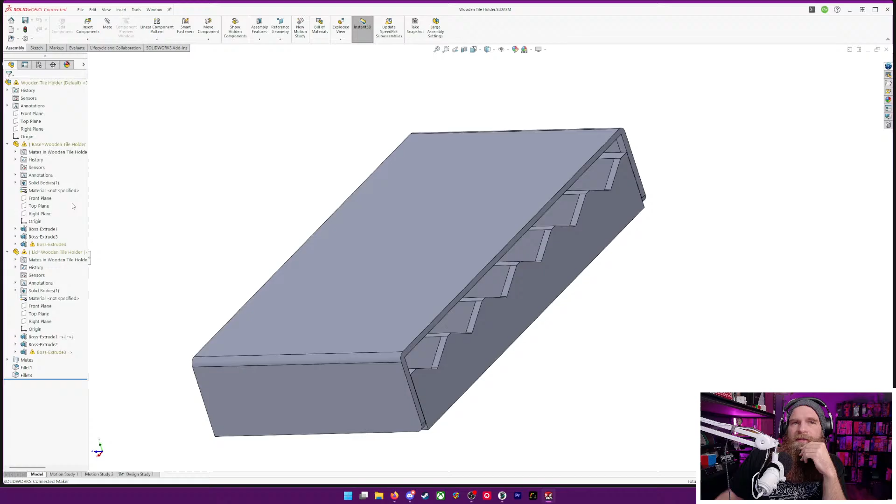Excuse me, let's see here. So I need to steal some settings here. Boss extrude, edit sketch. So I need to steal some settings.

And I'm just going to take my camera on my phone and take a picture of those spaces. Yeah, you like that? I did all that myself. So magical. Yeah, I can make that a lot better. I can make this better. It doesn't need to be this complicated.

So, exit, discard changes and exit. And let's go ahead and move back to my new. And let's go ahead and insert a new part. Oh, cancel. File, save to this PC. Board Games Bonsai, look at that.

So we're going to name this thing Wooden Tile Box version 2. Save. And we're going to insert a new part, and we're going to put this on. So this is going to be the tile holder base. Save. And put that on the top plane.

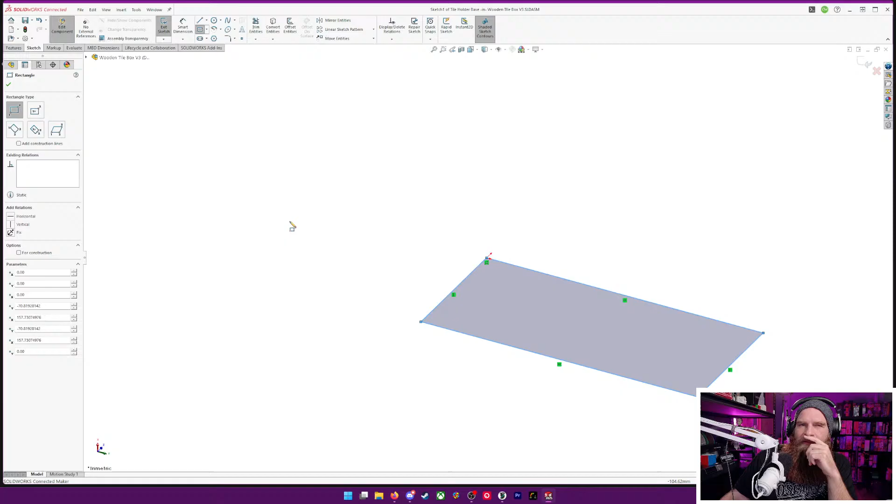Actually we need to base this rectangle on how much space we need for everything. So Control Z, let's grab one of these. Nope, yep, that's actually did it. 6 sides, inscribed. Boom, boom, there we go. Let's do that.

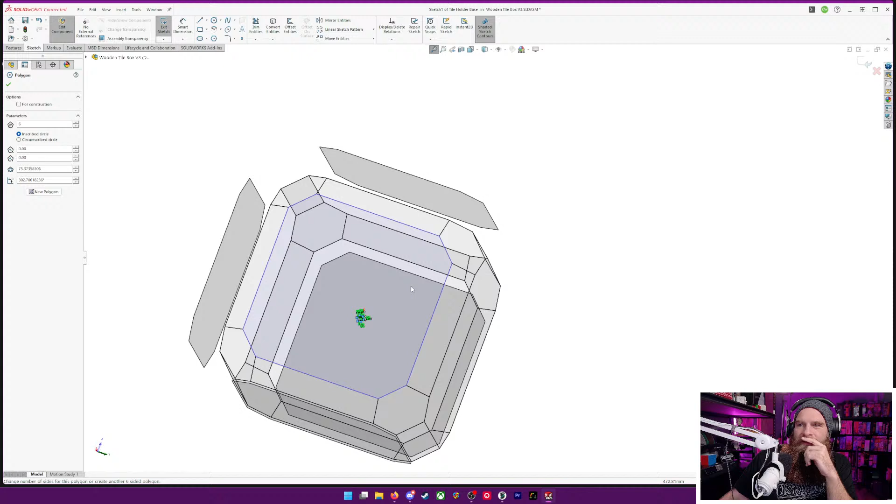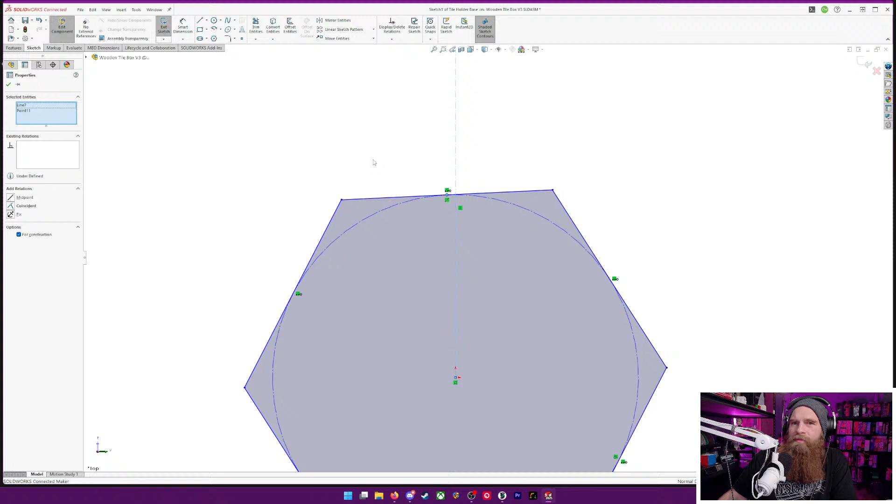Okay, and then we need to draw a line from here to here. Boom, nope, Control Z. S, I need a construction line. So from here to here, so that's going to be for this. I need the... where's that center dot? Boom, boom, coinky dink. Oh, actually, Control Z. I need one of these corners, and this to be the coinky dink.

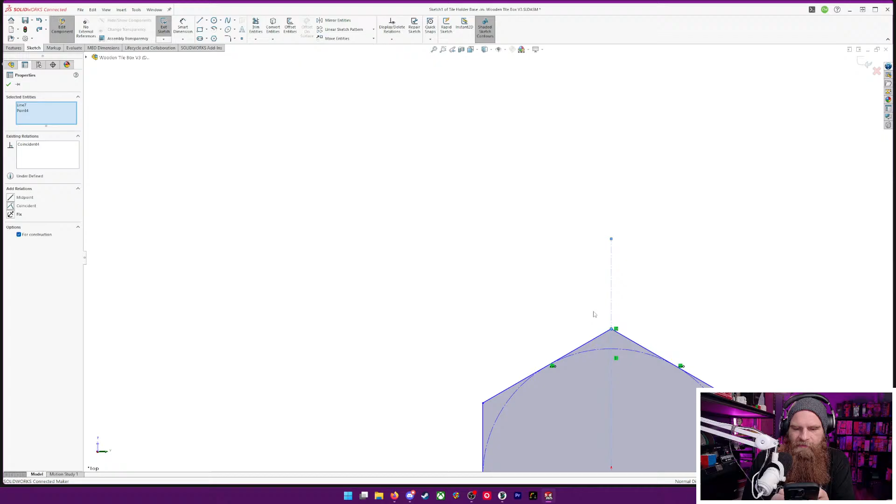There we go, and now we need to dimension this. And what is our dimension going to be? Since I'm just stealing it from the previous one... 26 millimeters. 26, fully defined. And I need a number of rows. 2, 4, 6 rows. Oh, my nose. 6 rows, okay.

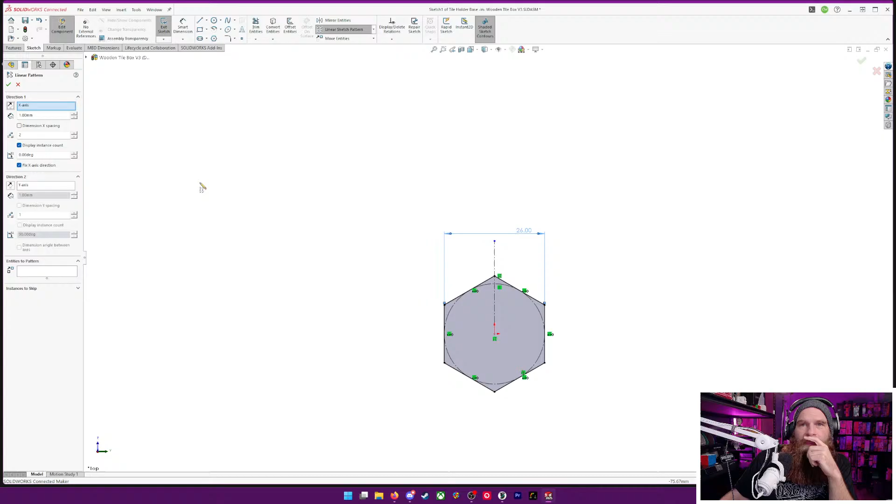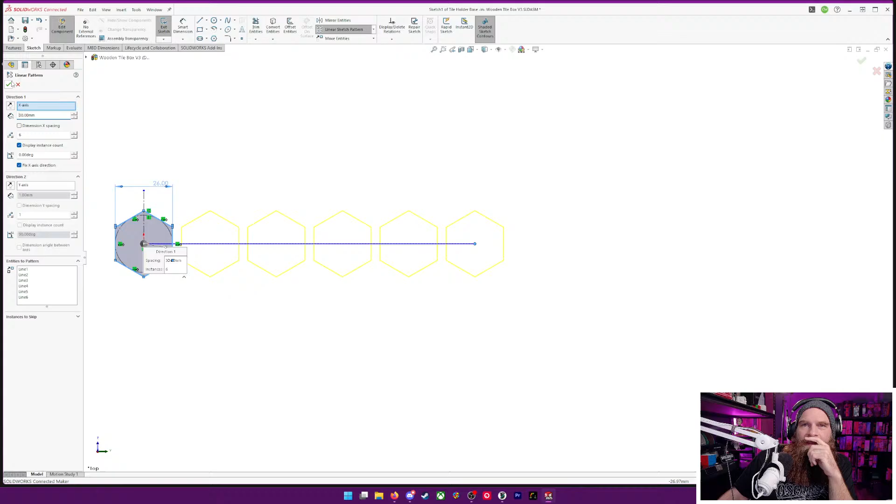We're going to do linear sketch pattern, and we're going to pick this, and we're going to make 3, 4, 5, 6. And we'll do 30 millimeters for now. That's fine, that's fine. 1, 2, 3, 4, 5, 6, that makes 6. Don't have to fully define any of these things just yet. So the gap between these things will be 3 millimeters. Alright, so that takes care of each one of the little areas that holds the bits and bobs.

And I kind of want to make... so one of the things that I didn't like about this, so if you can see this, it is easy to get these things out, but I'd like there to be even easier, like I'd like to be able to see this piece more. So what I'm going to do, instead of doing the sliding lid, I think I'm just going to do a lid that closes on top. Even though I did like this sliding lid, it serves no real purpose, and it actually takes up extra space because I can't just set this thing down.

It just kind of does this because... I mean, I guess I can float it, and it's got this floating area, but yeah, I want to make it so you can see these better in these triangles. I don't like those little triangles, I don't know, it doesn't look very cool, looks like a bunch of saw teeth.

So let's see here, we need to build a box for this. How do we want to build this box? Excuse me, well, we'll stick this anywhere, and we'll stick this anywhere. The start of the box begins. And from here to here, we'll do 3 millimeters. And from here to here, we're going to need more than 3 millimeters, because I need to make... well, if I do a lid style box, do I really need to do that? These are all questions that I should be asking before I get this far.

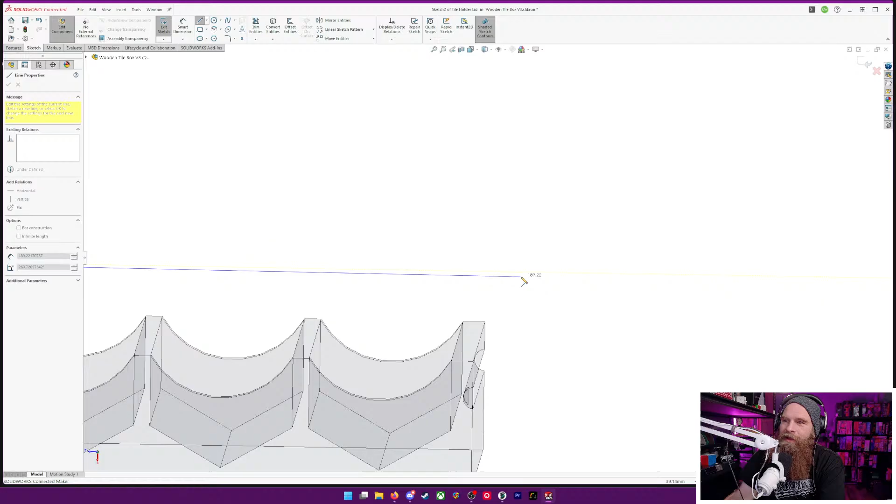Alright, I need to make a lid, we'll just draw. And we don't care about how far we are. Oh yeah, I like how I'm not even showing you what I'm doing. Jeez Louise, I am horrible. I wish somebody was in chat to tell me they weren't even seeing what was going on. They were just seeing my face.

So all of this doesn't matter right now, we're just drawing a rough shape of this lid. That is an ugly lid.

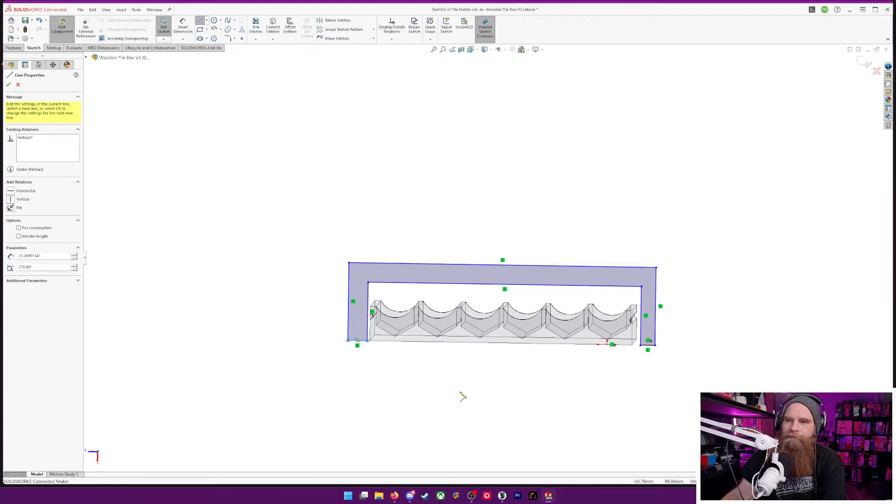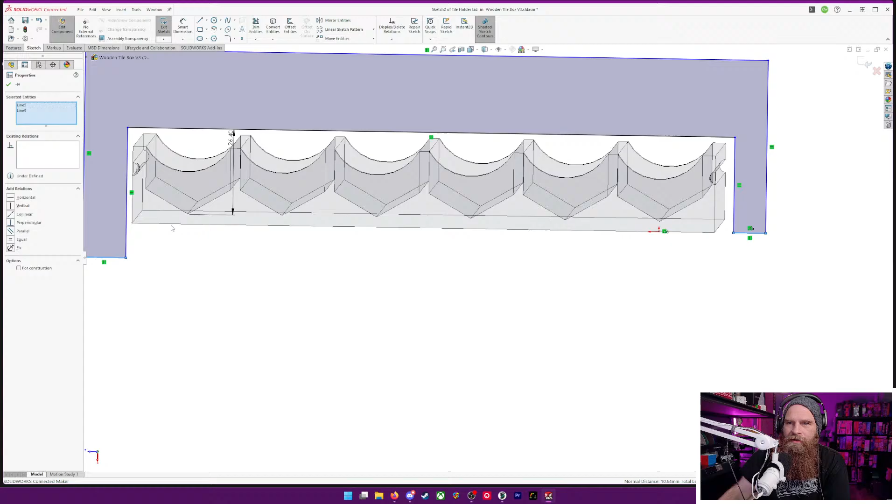All right, so smart dimension, this point to this line needs to be 26.4 millimeters. And this line and this line... wait, what's going on here? Why is that? Okay hold on, this line and this line need to be collinear and parallel. This line and this line need to be equal to each other. This line needs to be 3 millimeters.

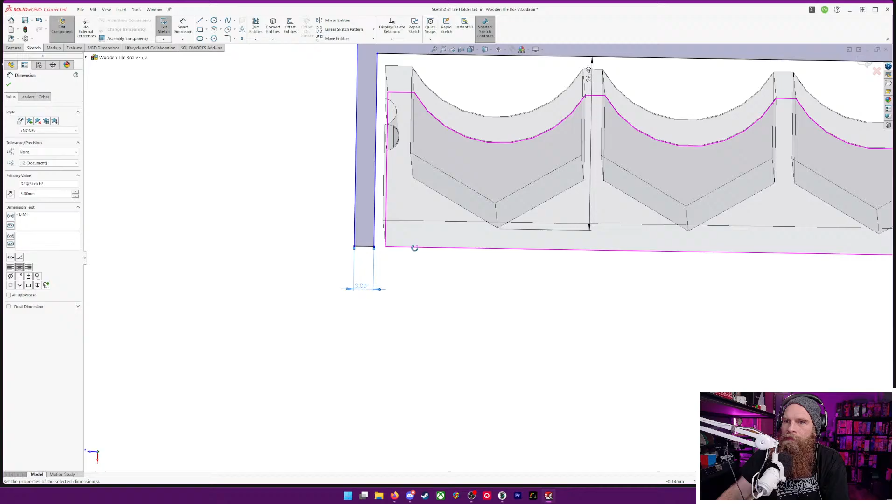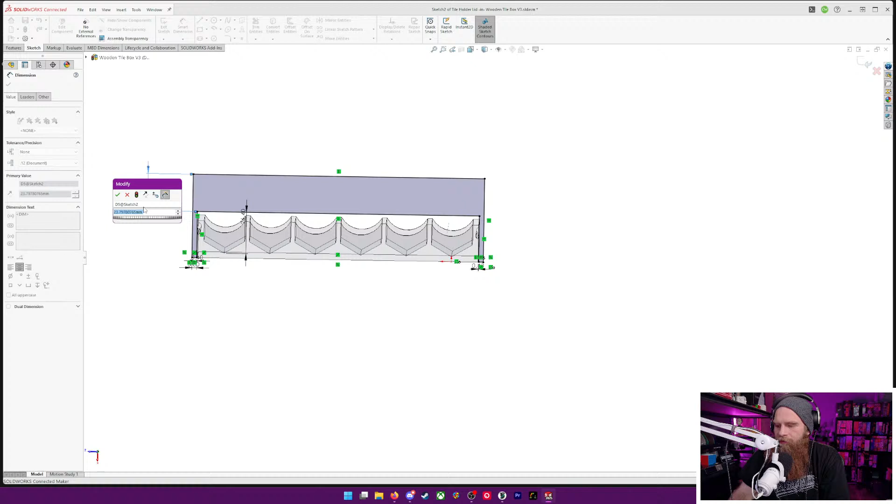And then this line and this need to be 0.4 millimeters, and this also needs to be 0.4 millimeters, and this needs to be 3 millimeters. Okay, we're getting there. And I'm not going to draw the little key part yet, and you'll see why.

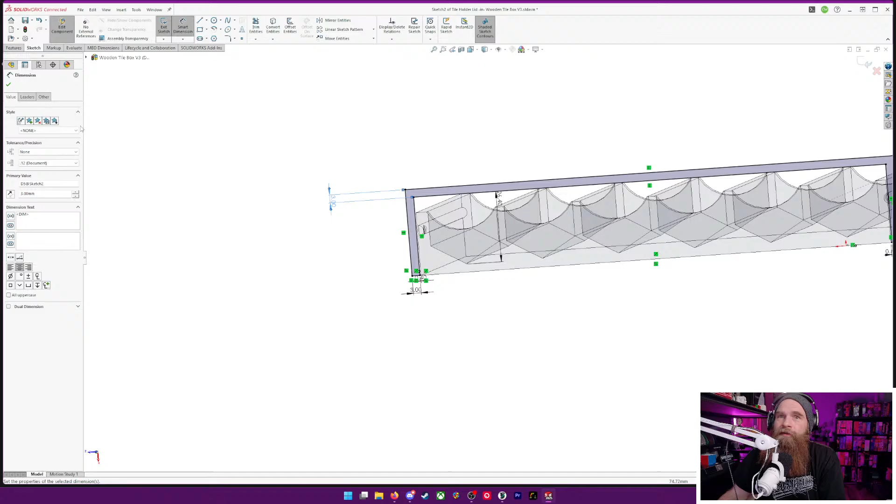So, feature, extrude boss base, and we'll pick the other direction. Actually we don't even need to pick direction. Up to surface, here, boom. And let's see, this is the side with the pin.

So, sketch, and we'll draw a box. Feature, extrude boss base, and blind, 3 millimeters. Boom, alright, that part is done.

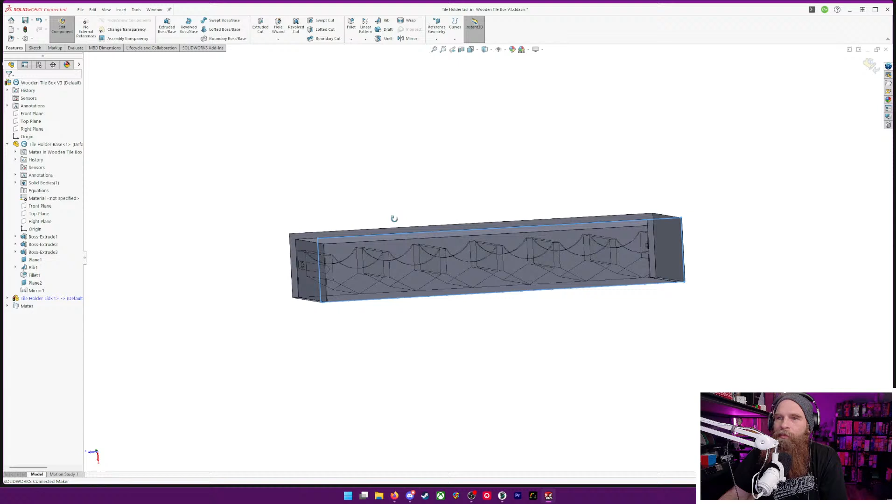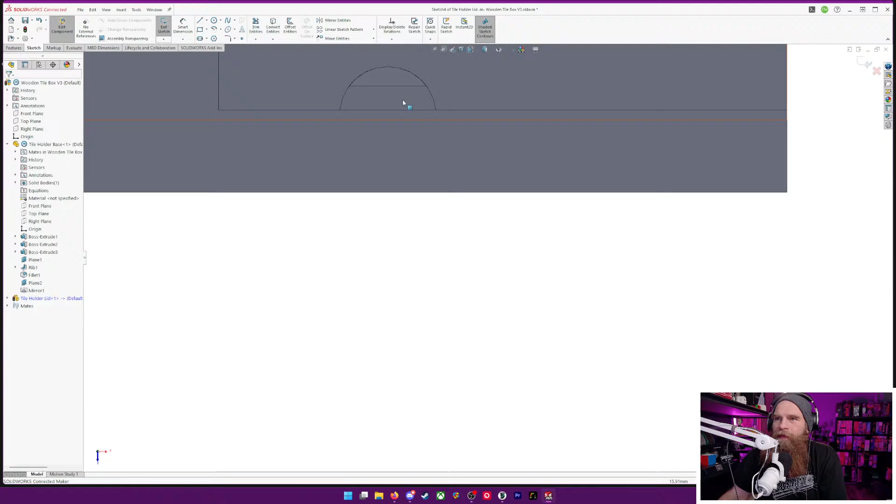Now we need to sketch and center line. There we go. And we need to put a circle here.

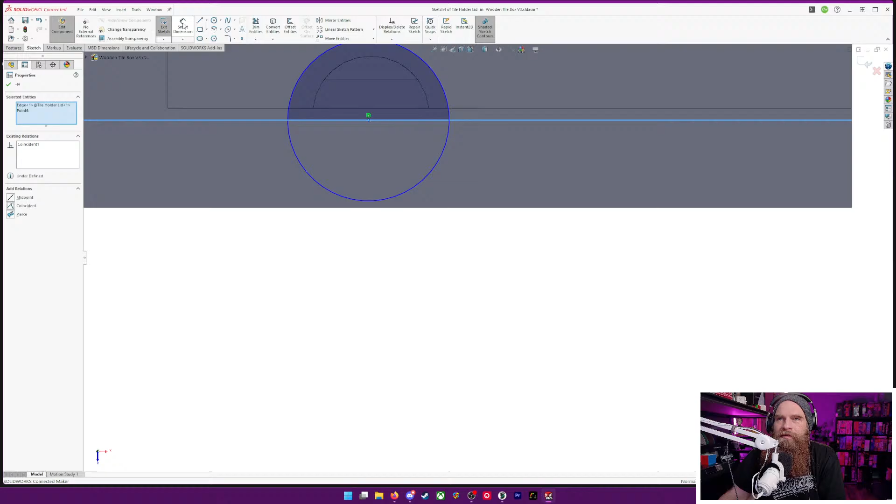And this circle needs to be, this circle actually needs to be attached to here. No, get off the dimension tool. Boom, boom, quinky dink. And smart dimension, I made that one 2.5 millimeters. No, it's 4 millimeters, right? Yes, so I need to do 4 millimeters minus 0.2.

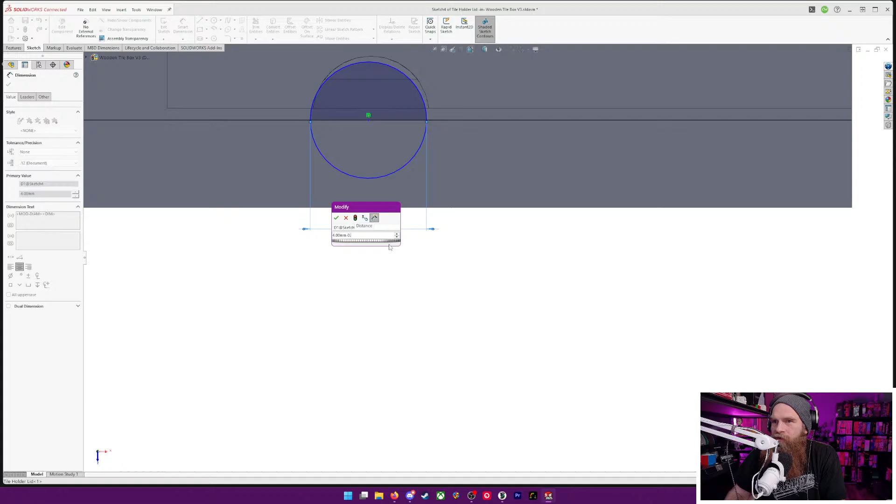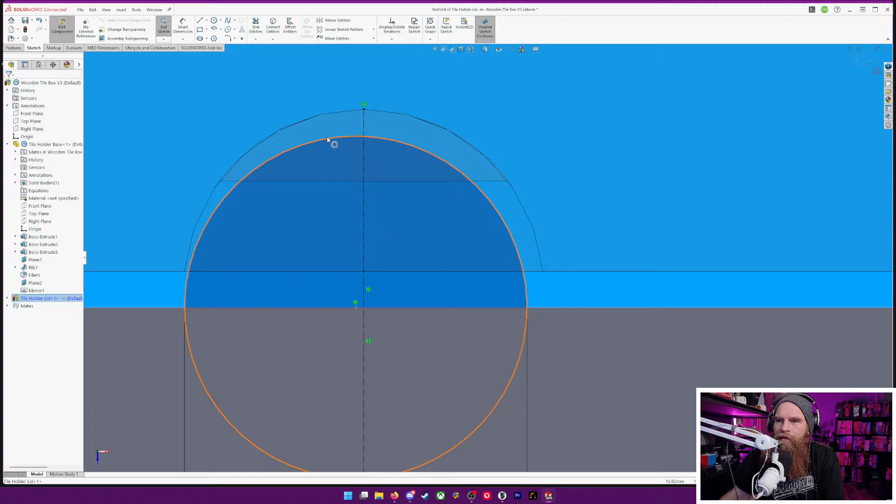And then I need to make a center line and coincident. There we go.

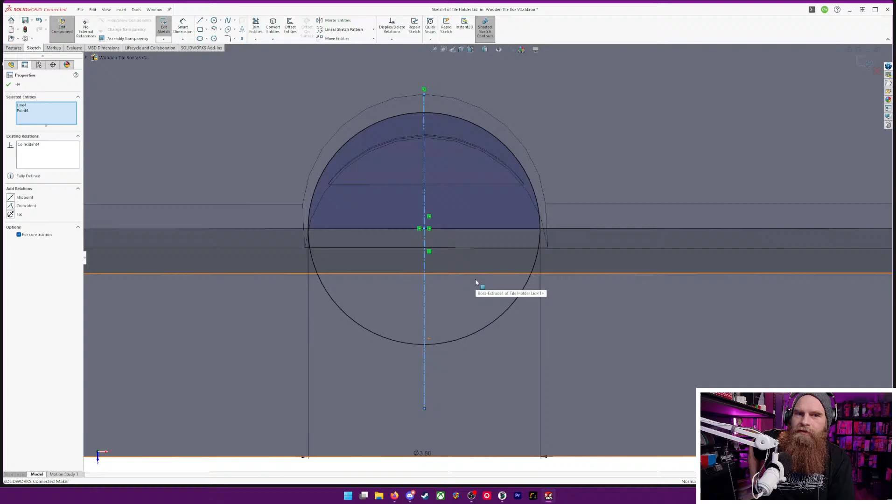Itchy, okay. Did I really want to make that quinky dink? I really need to move that up. Oh, I was supposed to go the other direction. Alright, I can fix that. Let me finish what I'm doing here. Oh, save to PC, oh cancel. Alright, let's finish what I'm doing here.

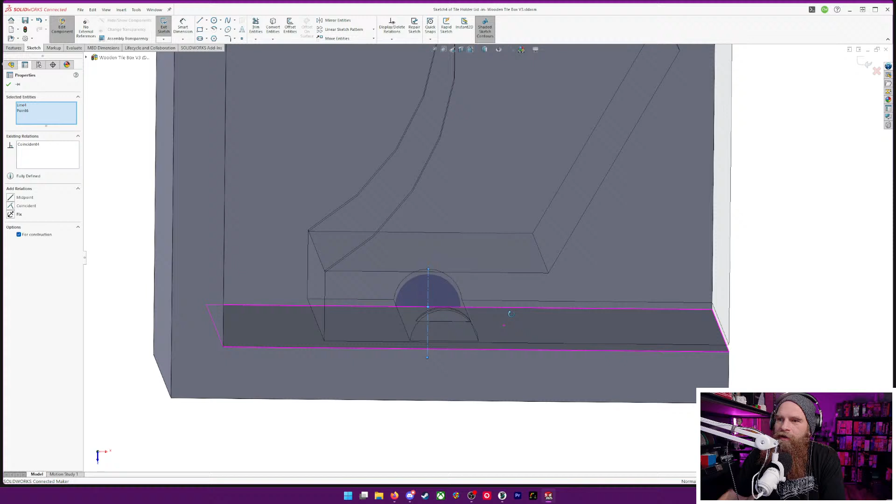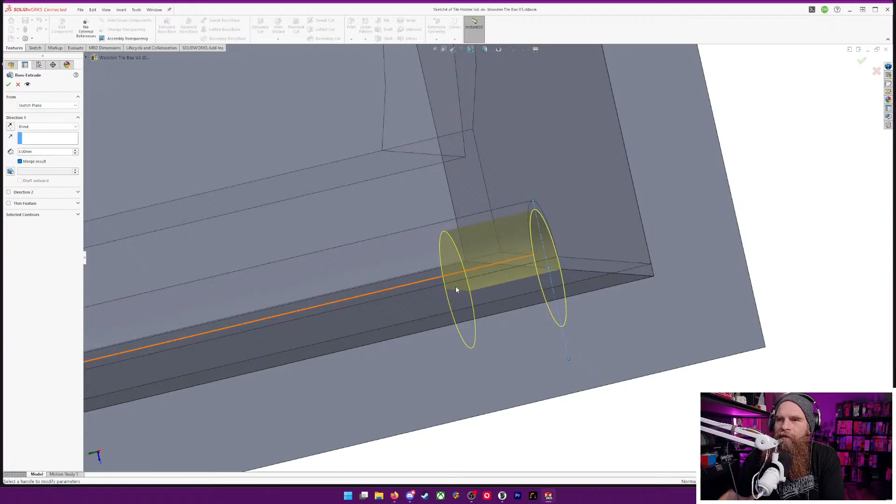Features, and extrude boss base. And we're going to go up to surface. Come on, can I grab that? Let me grab that, no. Erg.

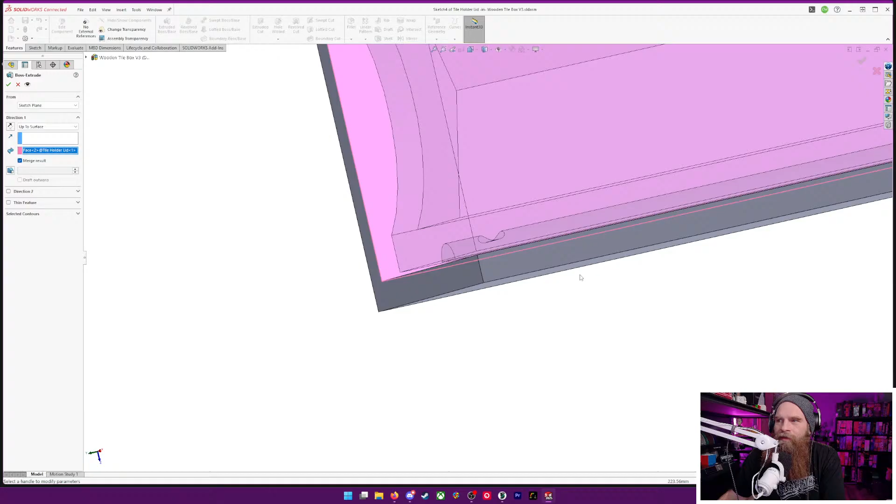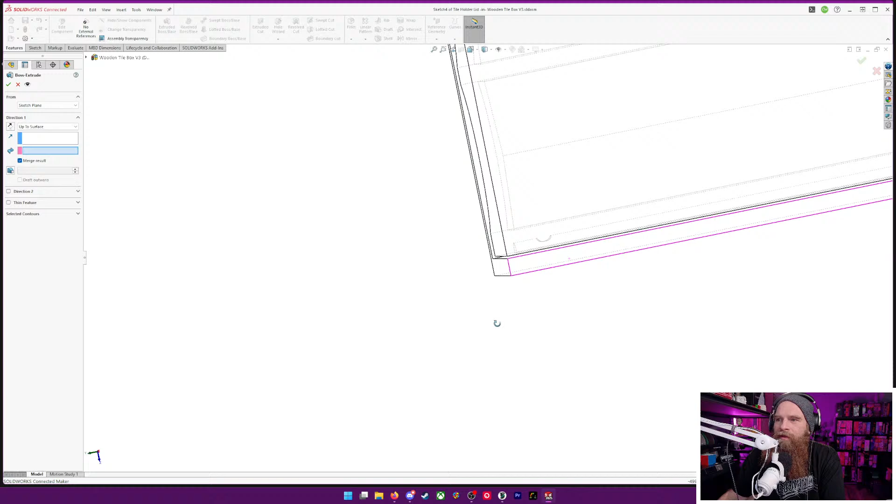Oh, I know what to do. I need to do this and this. Ugh, I hate that I just can't grab that surface through there. Wait, that was so close. Yes.

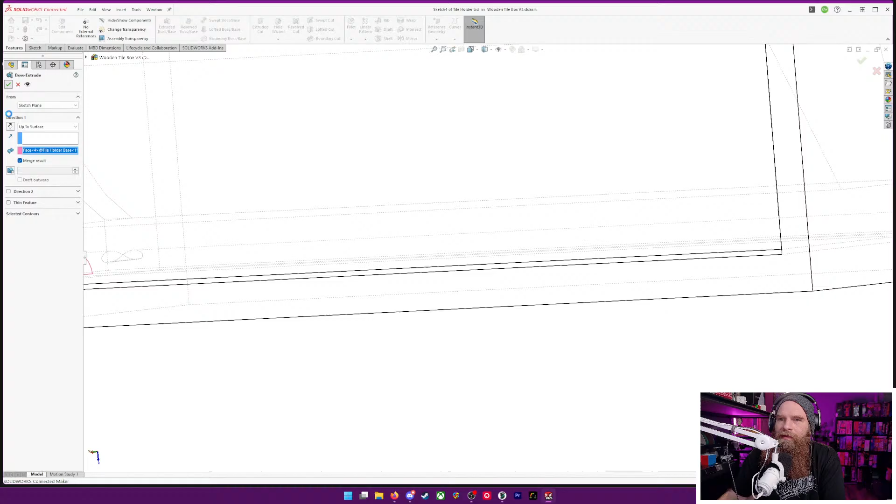Okay, now let's go back to this. Yep, there we go, there we go. All right, and then I just need to make that key in there. Easy peasy. All right.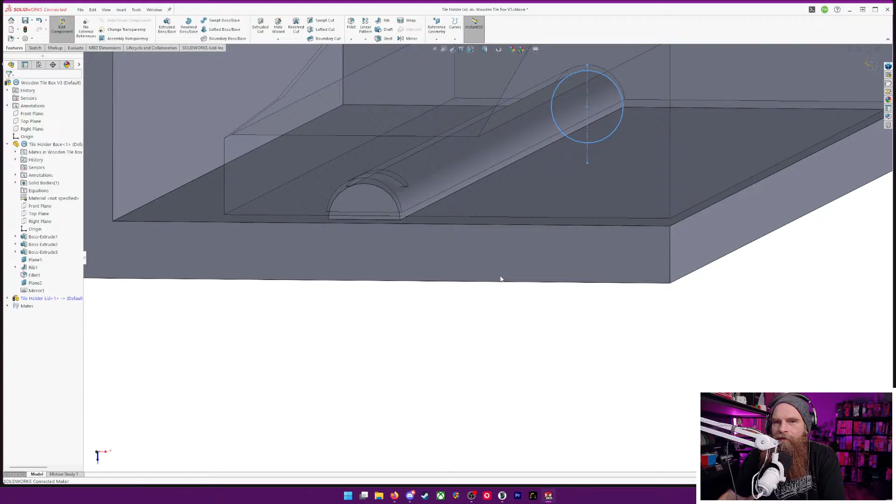So what's the best way of making that key? I need a plane that bisects this. See, this is the part I didn't think about. How do I make that key? This is where I need a person named Grubby to teach me how to do things. I need to make a notch here.

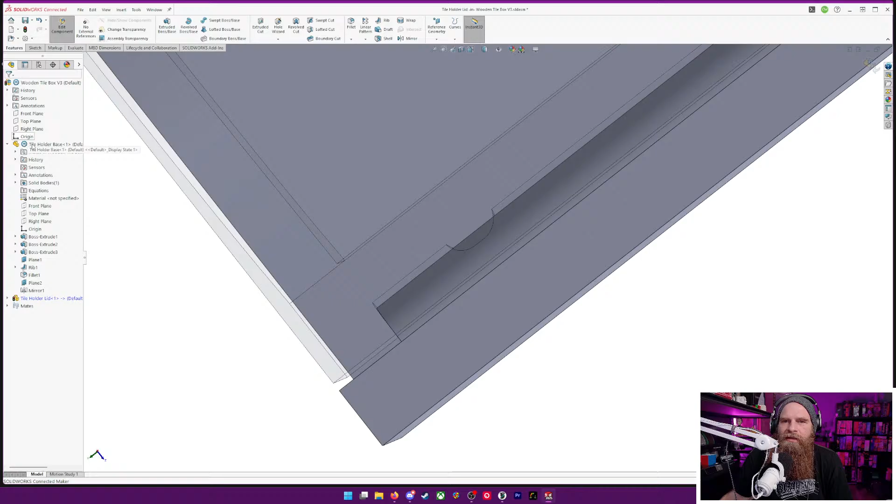Let's see here. I should have probably made a plane in the entire... oh, see, that would have probably done it for me. I can still do it.

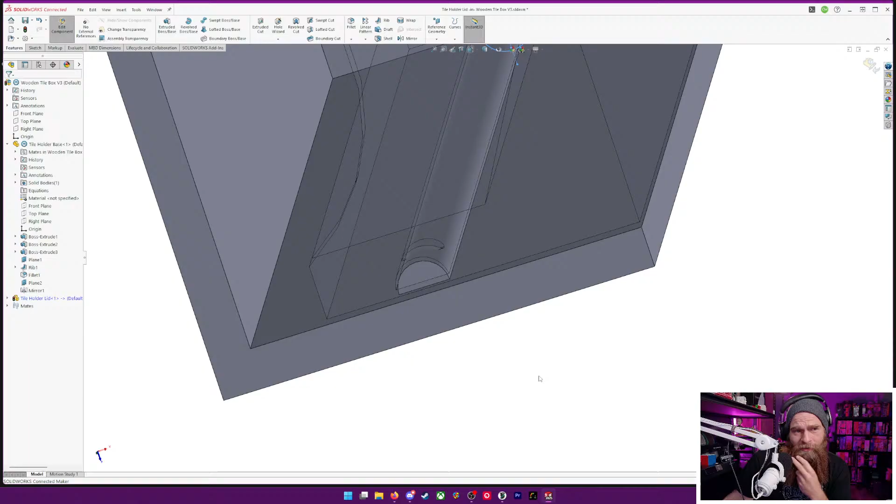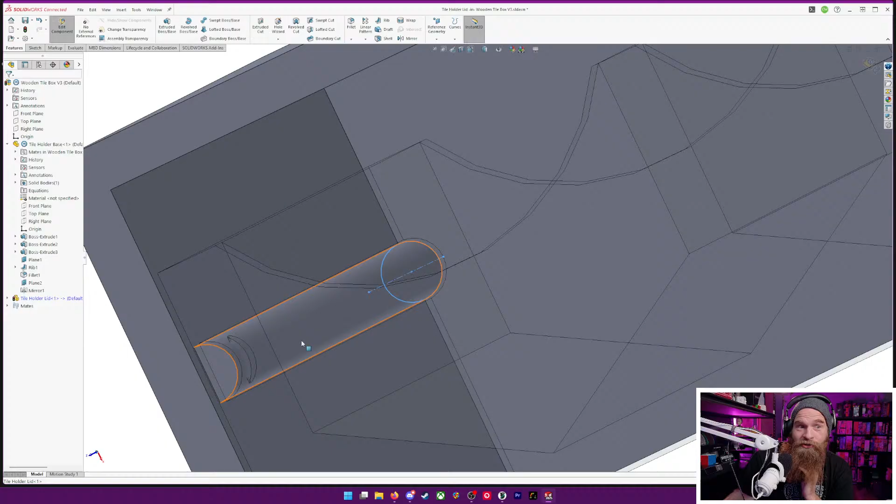Sorry, I got my Steam Deck over here. I had a bug with it. It didn't want to update, and then it's been all crashy. And I ran a command that was supposed to make it work better, and all it did was delete everything. So now I'm really pissed off at my Steam Deck. It's not an out-of-box experience like a Nintendo Switch, which I have too. That thing works great, it doesn't just crash and say can't update. Error, with no resolution. It just stalls.

I need to figure out how I'm going to... how am I going to make the... These are all good questions.

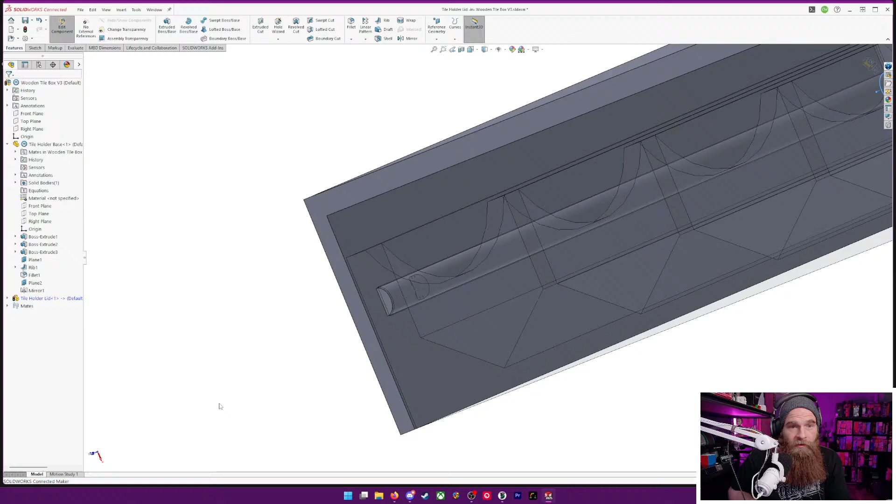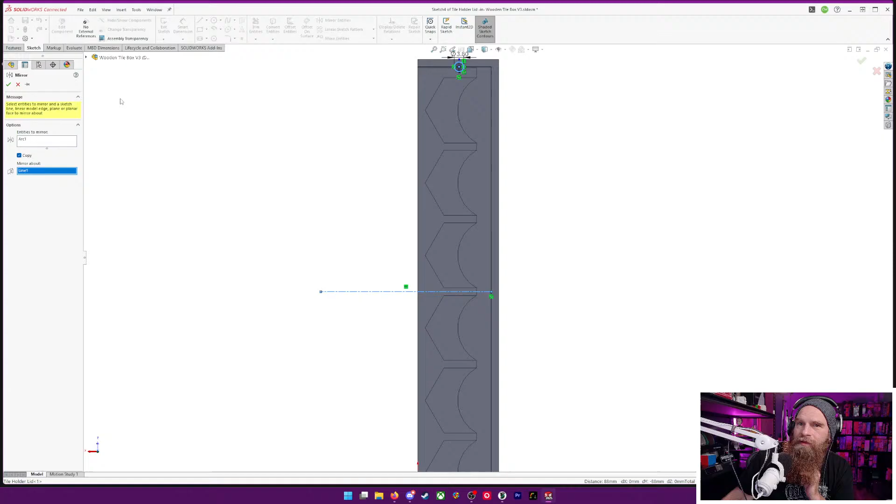Well, before I do that, let's go back to the sketch. And let's go ahead and mirror entities, mirror this, and we're going to mirror that across this. And hit that, and boom. Now I have it on both sides. Yep, sure do.

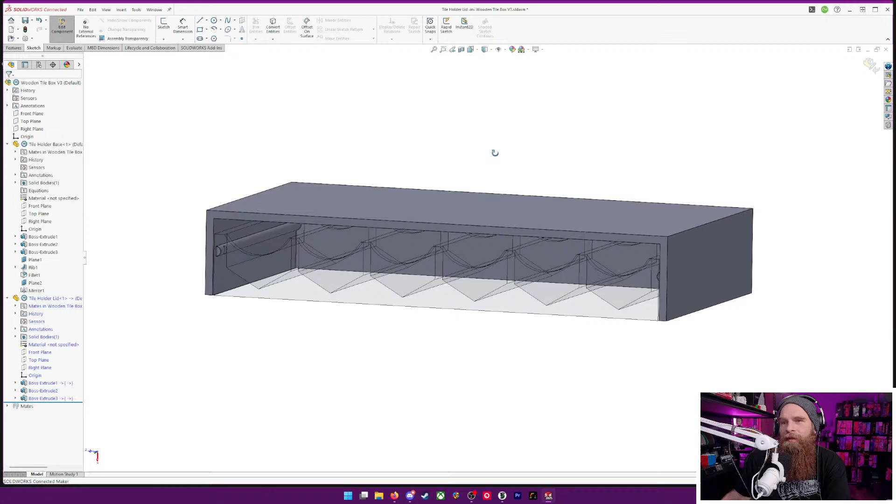These are all things that I need to figure out. How do I make that key?

I mean, I probably made that notch very wrong.

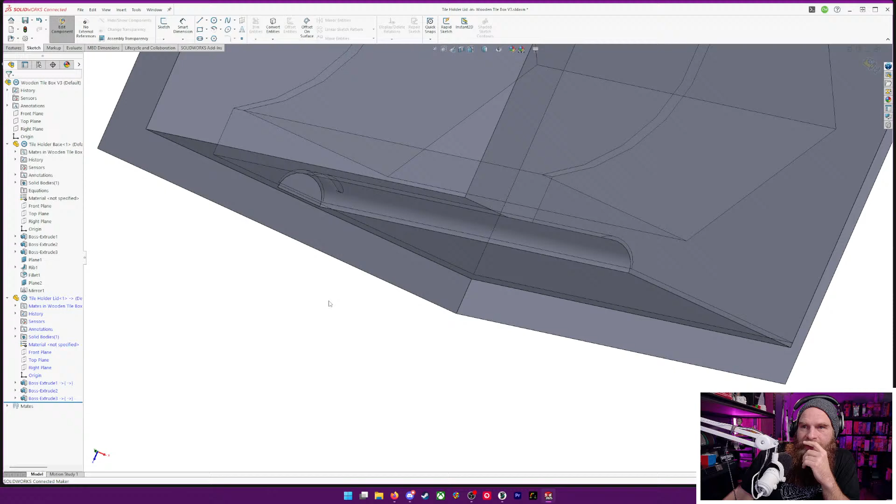Because it's what, this plane? This plane I used to make the rib. And that's the problem. I should have made that plane a global plane instead of making it a plane just in that part, because then I can't use that plane to make my other end here.

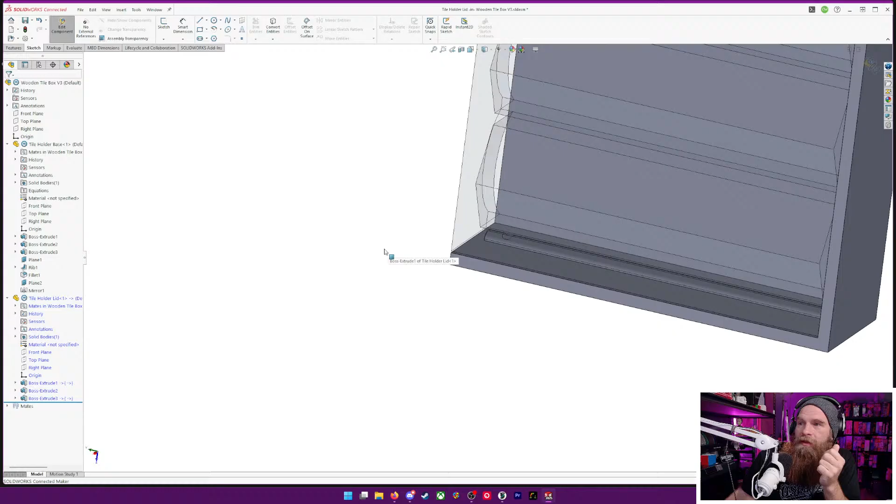So I might have to do some backtracking here, which isn't going to be a huge problem. Not going to be a huge problem, but I'm going to leave this part. And there we go, we have our box.

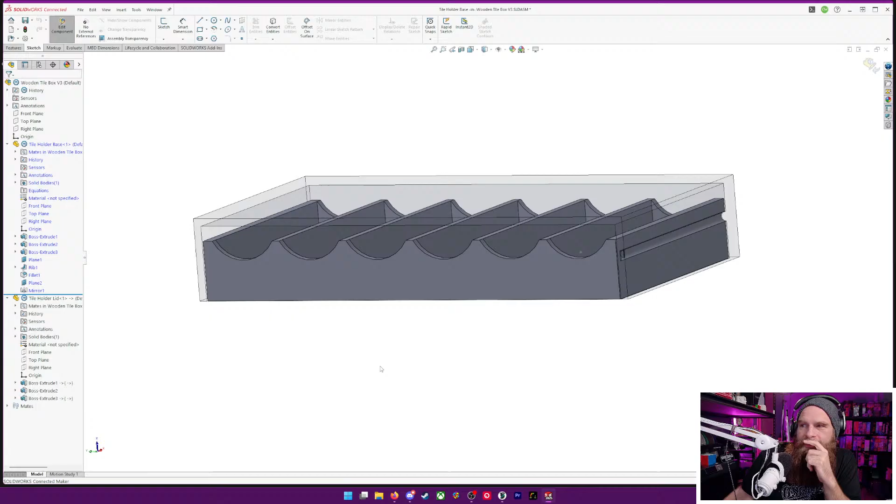With a sliding lid, but I didn't build the lock right. So let's go back to this part. Edit component, and we used this plane that I designed to do that. I need a global plane. I need a plane that's...

Oh, I'm so... it's already 10 o'clock. Jeez Louise, I've been streaming for almost an hour and I'm already tired. I wouldn't be so tired. I would have started streaming sooner if my Steam Deck didn't have that bug.

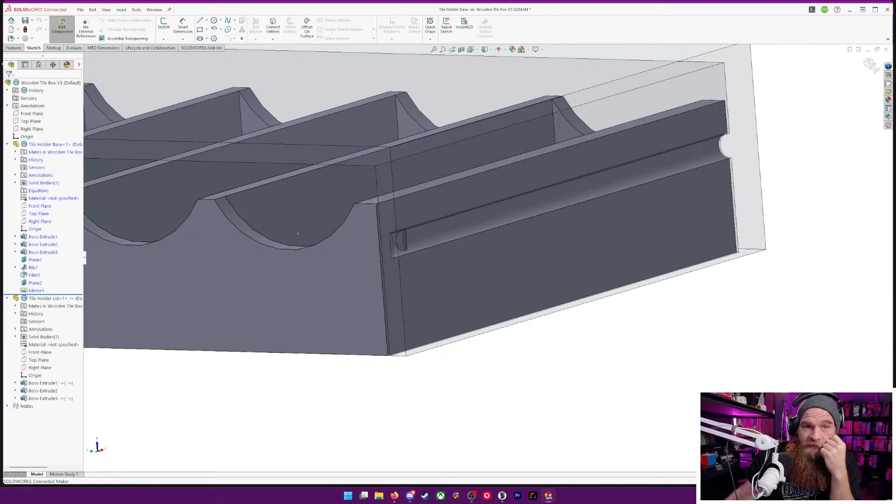Well, I can get rid of all of that right there. See, it's gone. And...

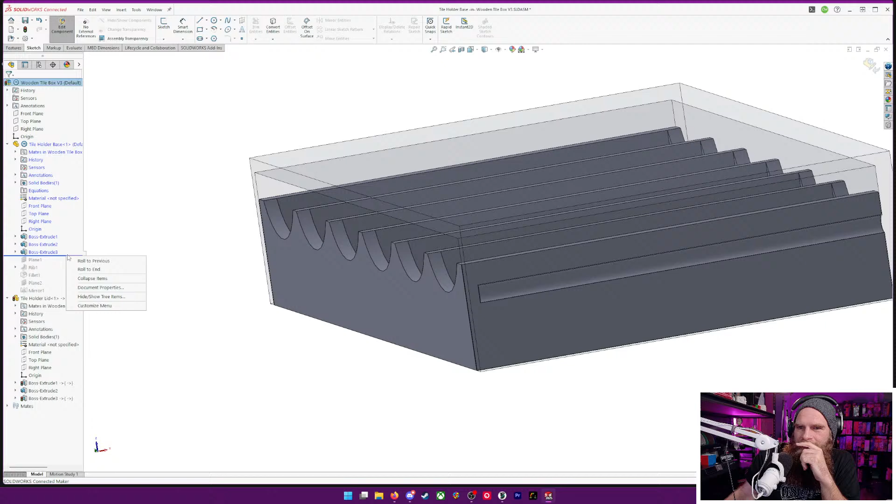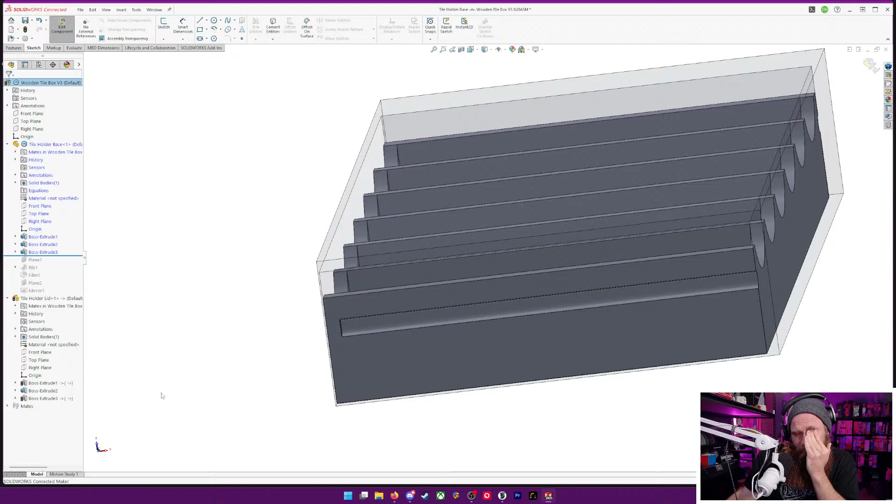I can make a global plane and then add the key and use that same plane to make. What's the best way? I thought I had it. I thought I had it, but in fact I did not.

Man, all right, let's see if I can figure this out. Let's leave that there, let's leave this part. Go back to my lid and figure out how I want to add.

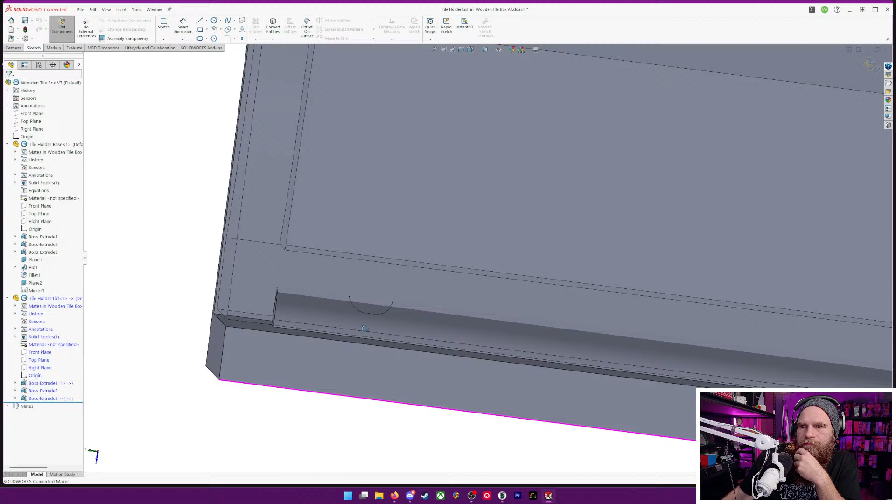Yeah, I mean, really all it is a square notch, and I added 2 fillets too. So I can do that exact same thing to this.

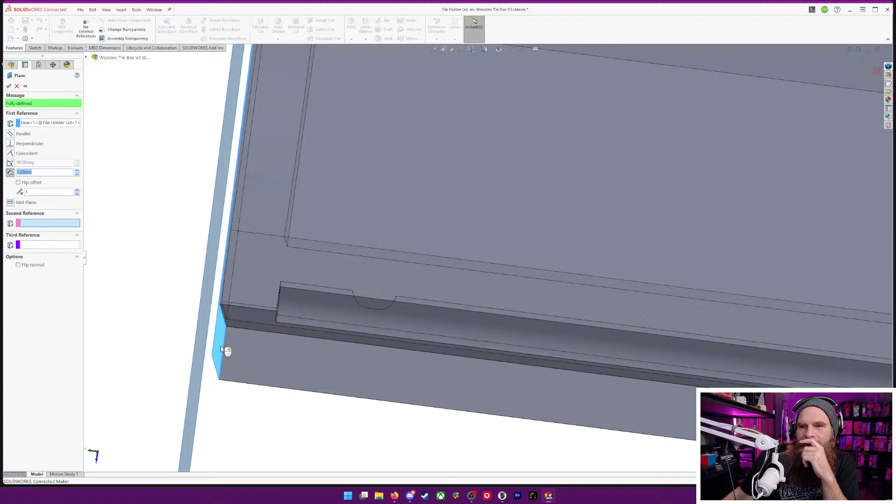So let's add a plane feature. Add a plane. And we'll base it off of here. And opposite.

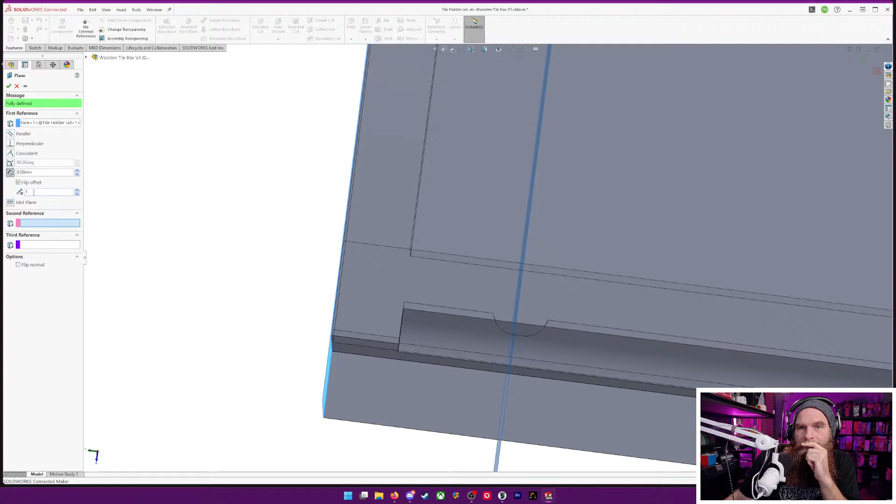Yeah, of course that's not perfect. What would that number have been? Really shouldn't be doing it like this, this part is wrong. Yeah, because that should be 3 millimeters. Yep, 3, 4, 5, 6, 7. Yeah, 7 is the edge. 8, 9. Oh, that's right, it should be 8.5 or 8.25. Because it was 4.5 or 4.25.

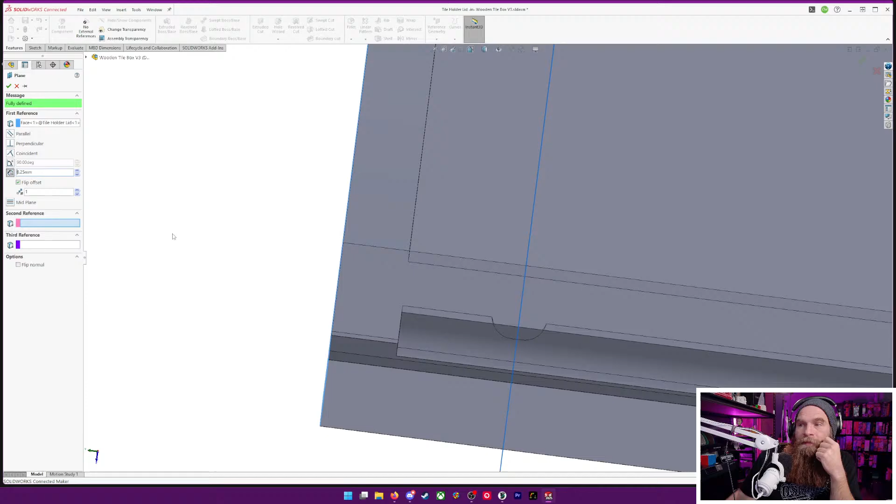So, boom, plane. That plane there doesn't really help me, because I want to be able to cut straight down through the object from the center of it.

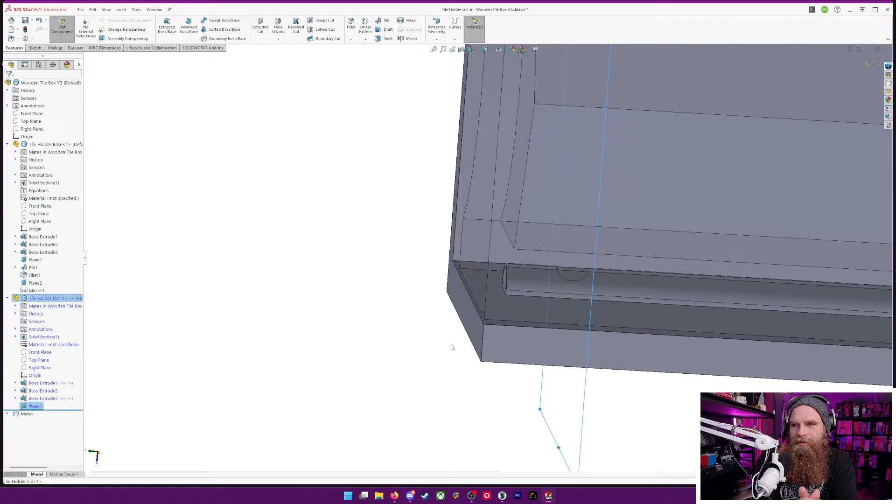Oh, man. I really want to take a rectangular... no, yeah, I'm wrong, I mean it could work. But really what I could do is edit feature. And instead of that, we'll do 7. Boom.

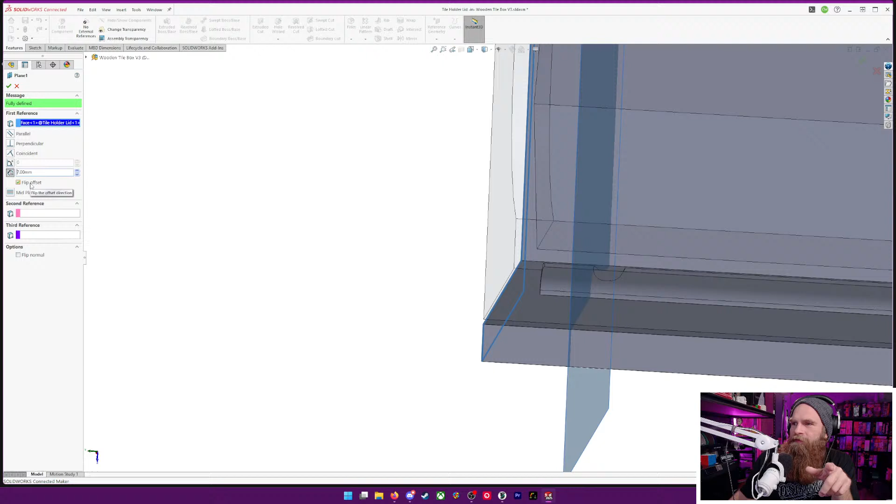And we'll sketch on this plane.

Yep. That's not much of a key, but it'll do just fine. So we'll do a little rectangle here.

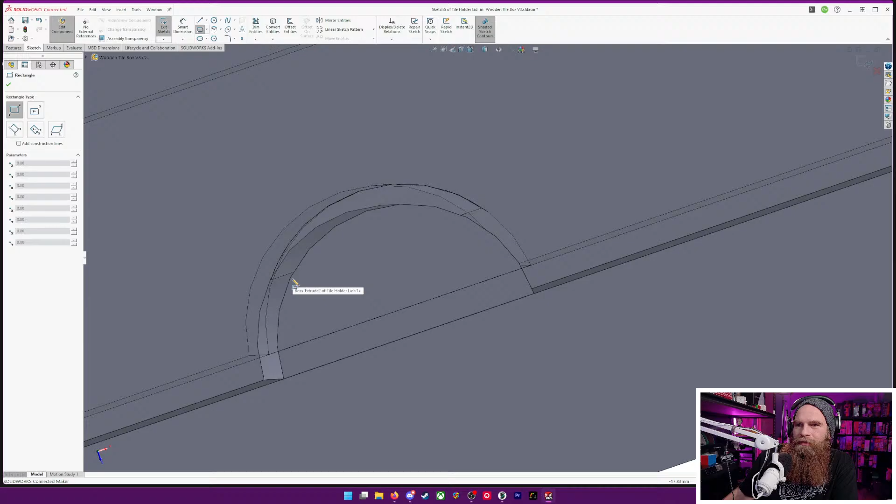Whoa, why did that rectangle go there? Oh, try to base it off the... okay, I'm lost. Where did we go? Okay, that's why.

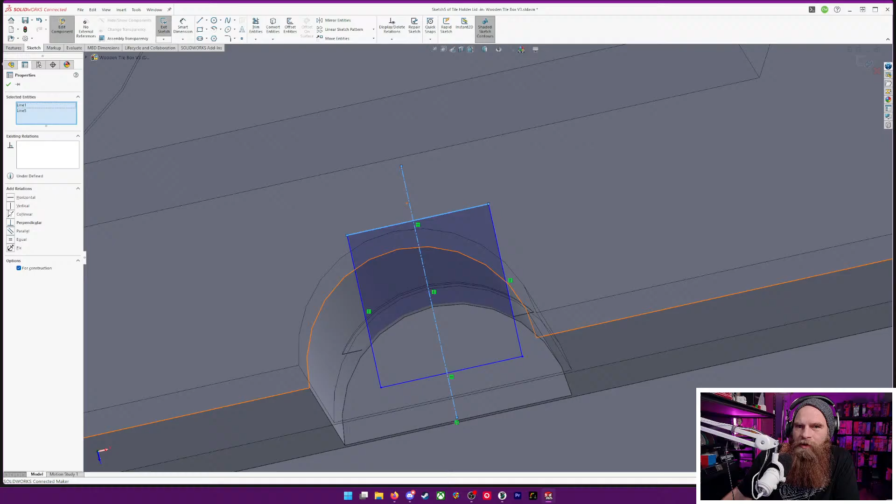So... center line... where is... there we go. Endpoint? No, that doesn't make any sense. This dot and this, coincident. Okay.

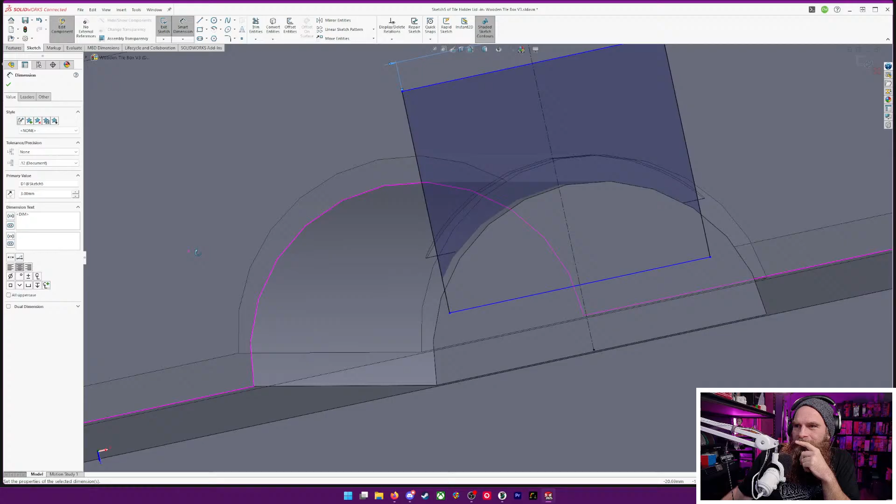And 3 millimeters. Ugh, hate that my axis of rotation is so far away. Okay. Four? Nope, 4.5? I'm just winging it at this point. I'm honestly just winging it at this point.

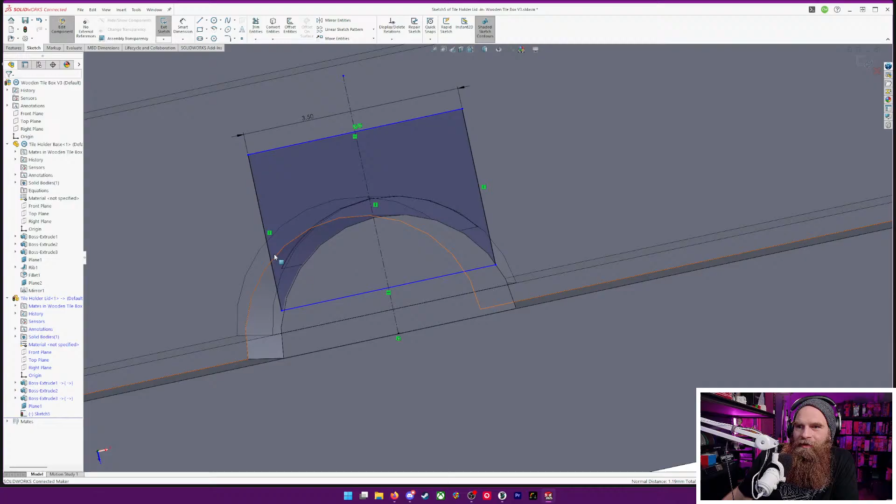And this line and this line need to be... sorry, this line and... nope, get off of the dimension tool. Oh, I can't just select that line? You silly goose.

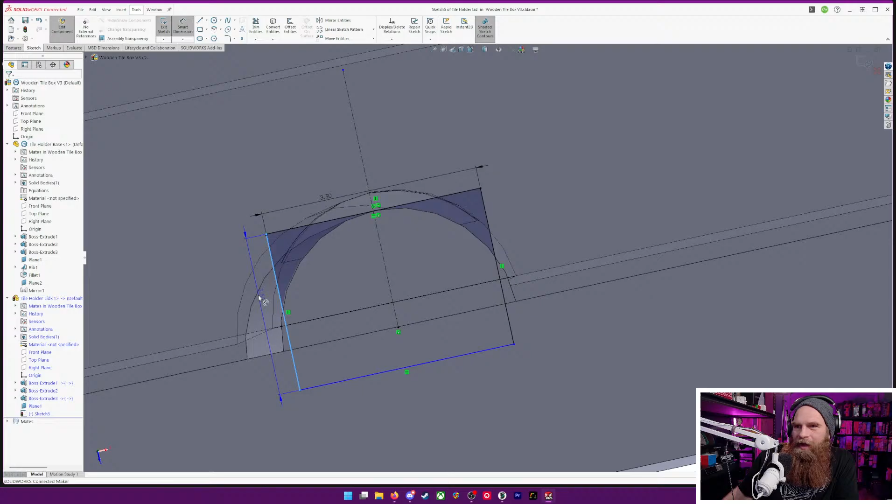Okay, well this line and this can be tangent. And this notch can be 2 millimeters. That'd be weird, that'd be half of it. 1 millimeter? 0.8? 0.6? That'll do.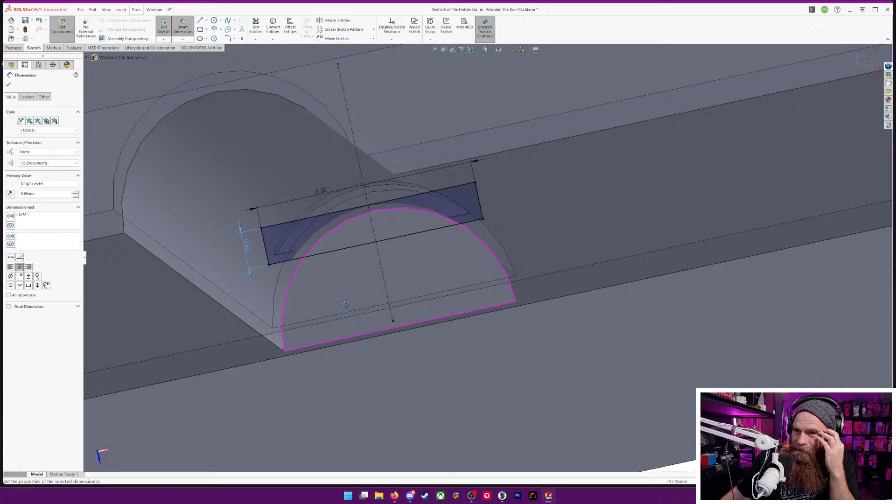That'll do. And feature, extrude cut, and 4.5 millimeters.

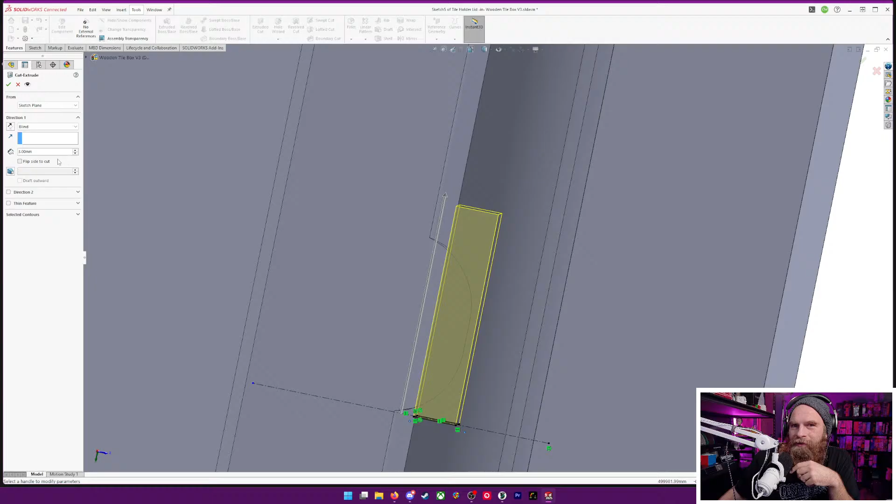Yeah. Yep, that is right on there. That's a little long, 2.5. Boom.

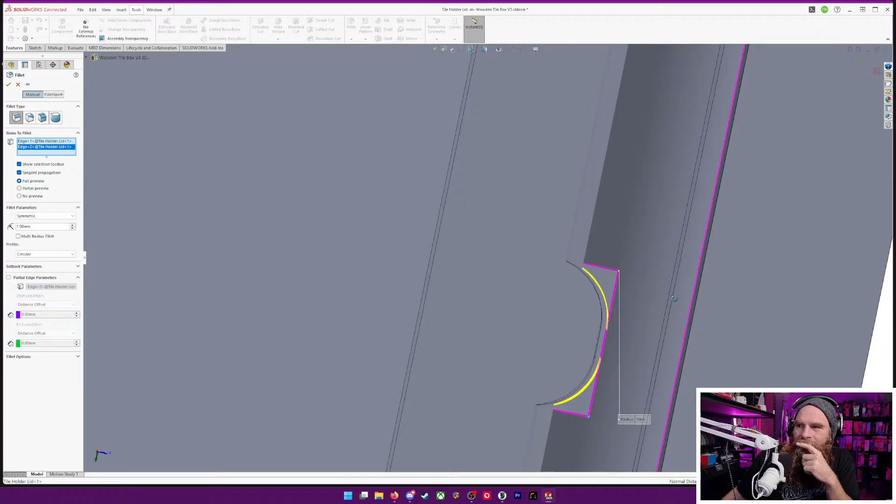All right, and then we're gonna do fillet. And fillet. 0.8, yeah that works. Well, that was the very worst way possible of doing that. No, do not do what I was doing.

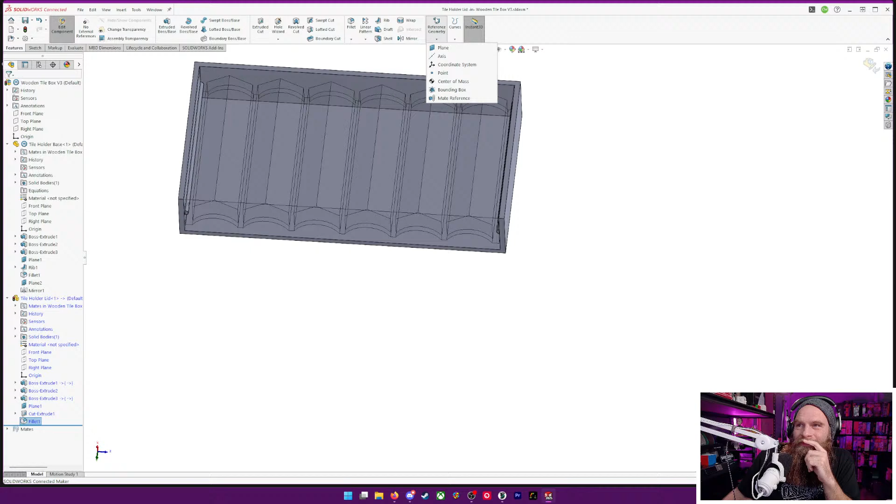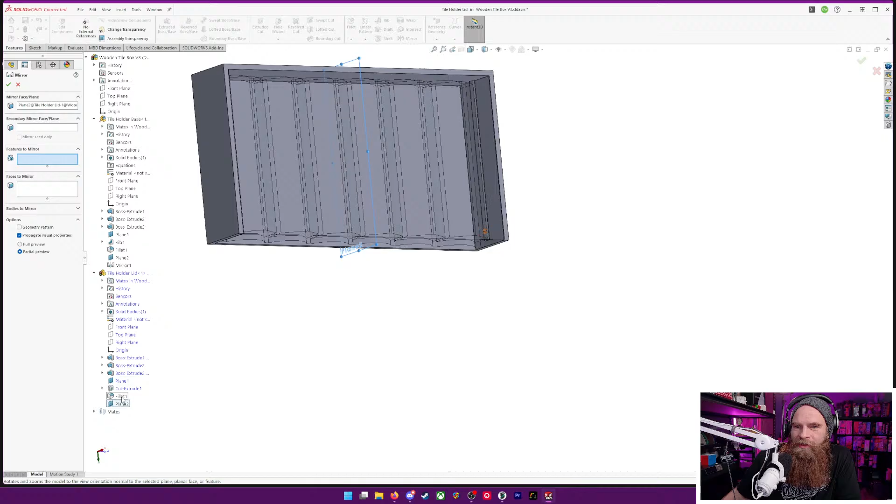All right, and reference geometry, plane. Boom, boom, boom. And then we're going to do a mirror. Mirror plane is going to be this new plane we added. And features to mirror is going to be this and this. Boom.

Okay. I mean, I did it. I don't know if it's going to work. It's going to be a good test. But it's all there now. It's all there.

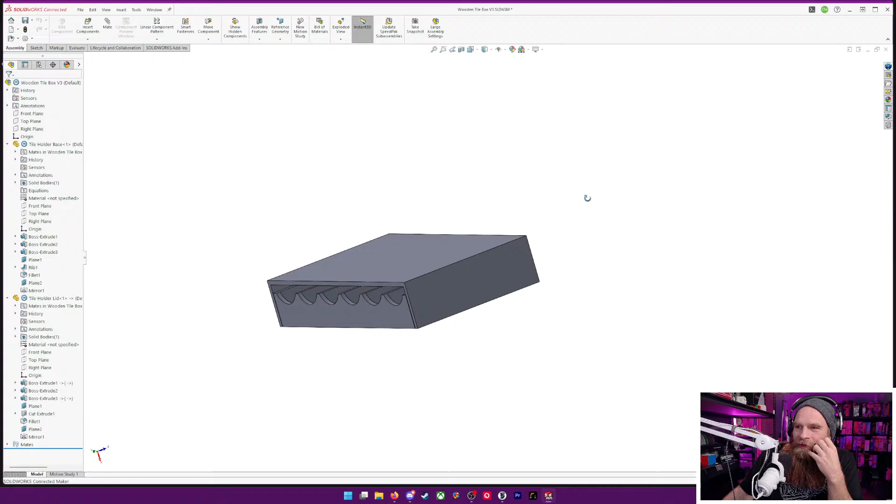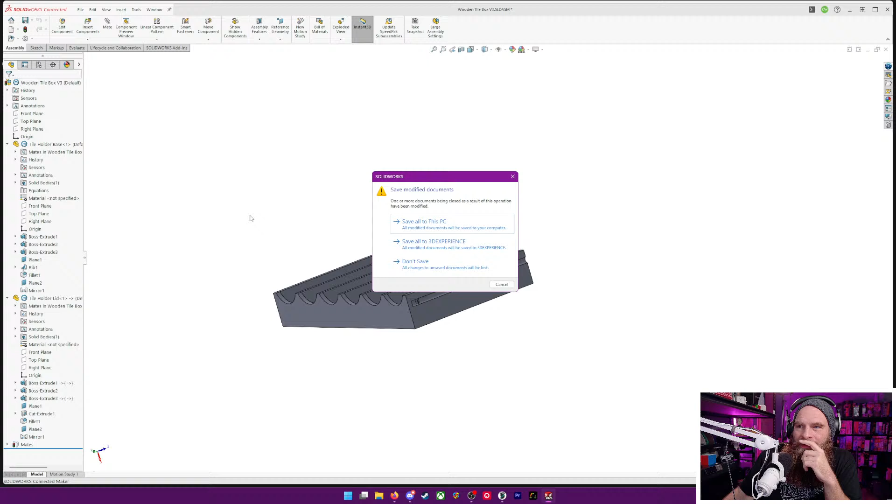I think Grubby told me if I did, is it this? And suppress. Oop, cancel. All right, file, save, save all. Oop, unsuppress. Where is it?

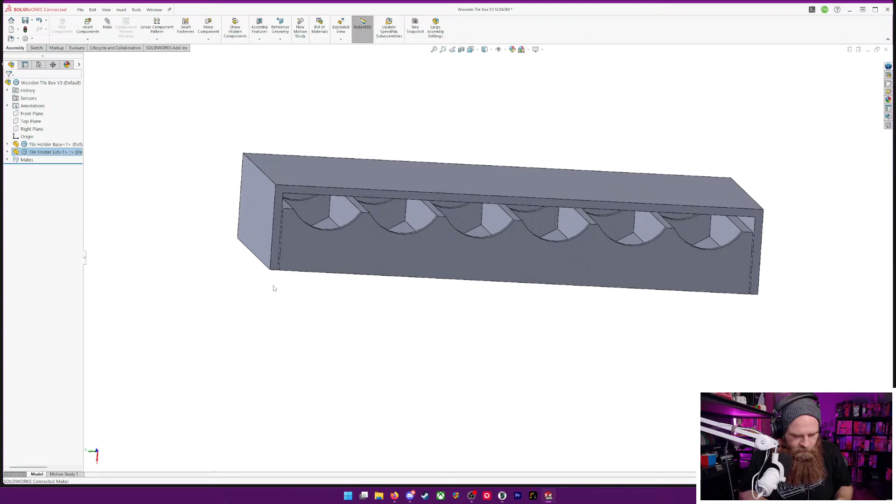I don't remember how he showed me how to do it. Alright, now we can add some fillets, because we gotta add some filletos. I didn't even add any to this one. But this should work, this should work.

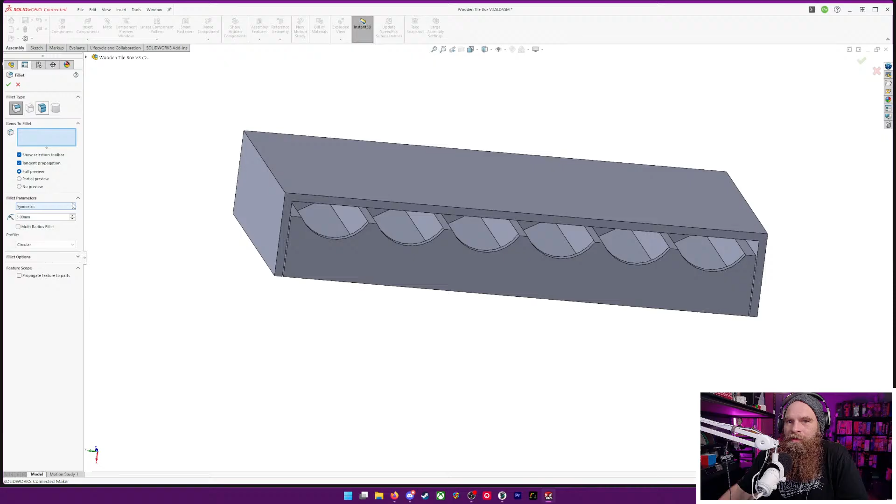So assembly features, fillet, and 3 millimeters. Boom. Wait, what? Oh, there we go. Come on. Yeah. Yeah, we make those rounded corners. And boom.

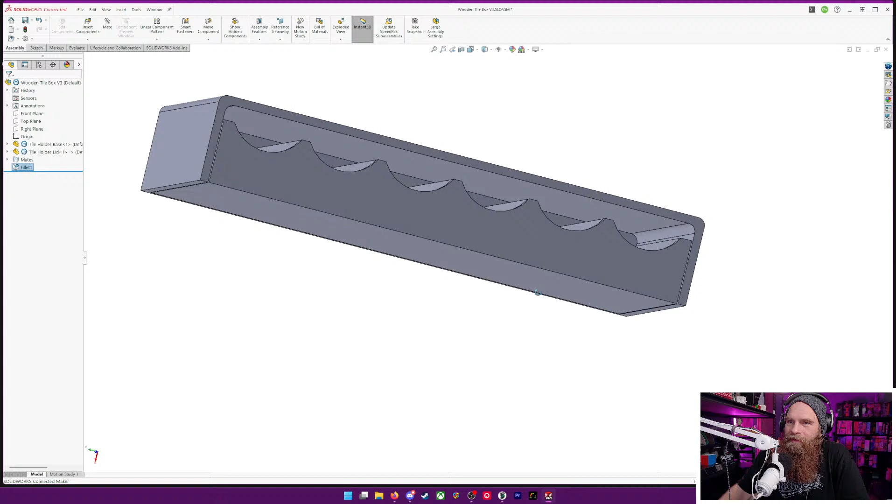That's really the only ones I wanted to do. Oh yeah, I had a little notch here. I could add a notch there, but we won't. We'll do a test print of this and see if it works out. That's it, that's all I want to do. We'll hit save.

Save is done. I wish I could remember what he showed me to do to make it so it doesn't, so I can move it around.

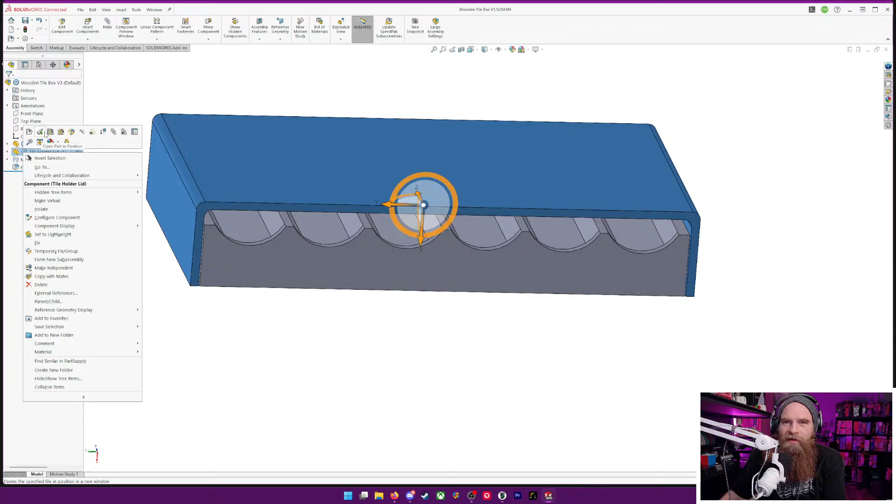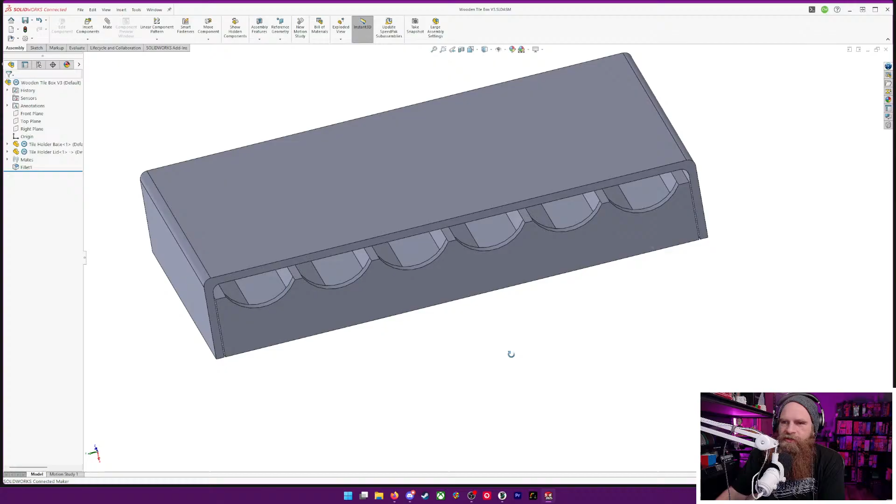All right. Well then, we have now made another container to hold parts. Then it should lock, because I added a lock. Very badly.